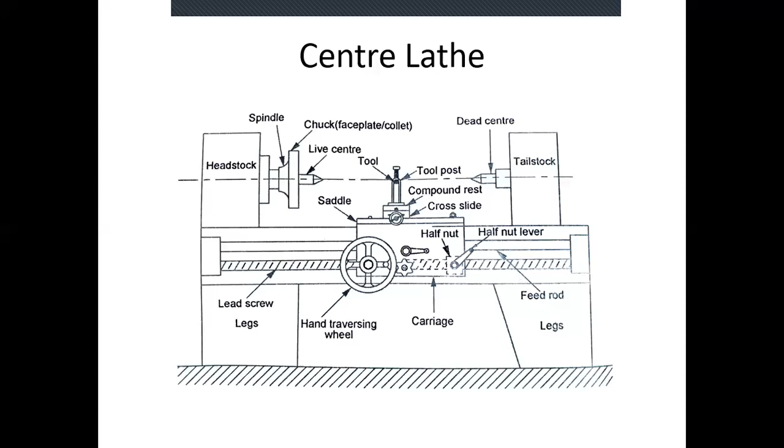For adjusting these jaws, you will have a separate keyway in a particular area, on the top side of the chuck. In that keyway you insert an adjusting nut, and rotating the nut will move the jaws in a front and back movement. The three-jaw chuck is used only for holding circular workpieces.

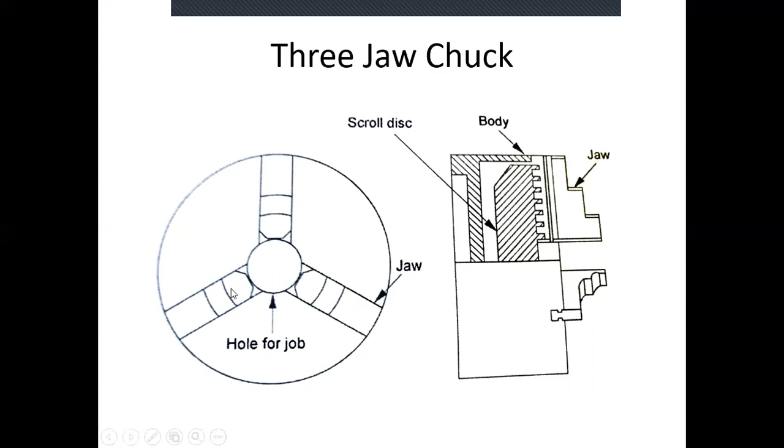With a three-jaw chuck, you can hold only circular workpieces. The next one is the four-jaw chuck. In the three-jaw chuck, with a single adjusting screw, you can adjust all three jaws simultaneously. That is also one important thing in the three-jaw chuck.

Now in the four-jaw chuck, you see there are four jaws. These four jaws are movable in an outward and inward direction, but in the four-jaw chuck, for each and every jaw, a separate keyway is available. In that separate keyway, that particular jaw can be adjusted. For each jaw, there is a separate keyway for adjusting the jaw in a front and back movement.

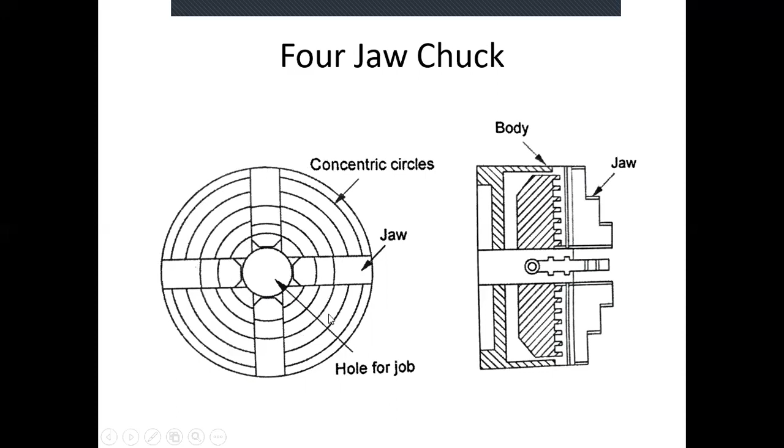In the four-jaw chuck, you can hold circular objects, or you can also hold irregular shapes or square shapes. So different types of shapes can be held in the four-jaw chuck. This is the major advantage of the four-jaw chuck. The next one is the magnetic chuck. This is also used for holding irregular or regular shapes. But in this chuck, you can hold only workpieces which have magnetic ability.

Once you start the lathe, this chuck is magnetized. The magnetic chuck will have magnetic properties, so you can hold only objects which have magnetic properties. This is one of the major disadvantages of the magnetic chuck. Advantages: you can hold any type of object, irregular shapes, regular shapes, anything, in the magnetic chuck.

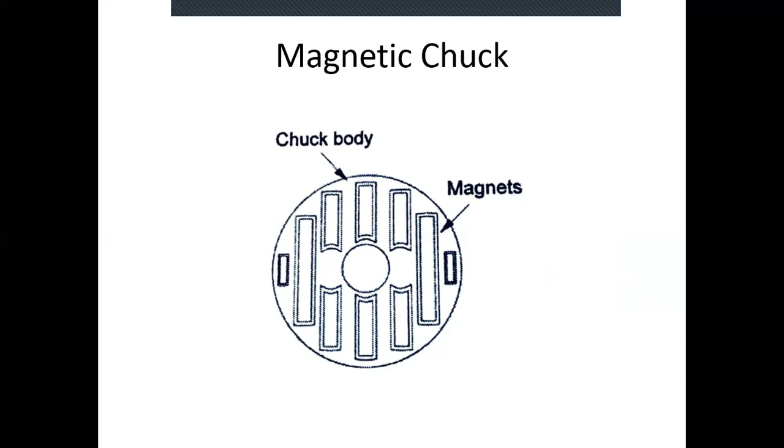Now in this class, this is the main topic. We are going to study taper turning methods in the lathe. So what is taper turning? Producing a small conical surface in the workpiece. That is the taper turning operation. Taper turning is done in the lathe by several methods. The first one is the form tool method.

When the cutting tool contacts the workpiece, metal will be removed from the workpiece due to the friction of these two materials. The cutting tool is a harder material than the workpiece. So due to that friction action, the metal in the workpiece will be removed. The form tool will be in a particular shape. Only in that particular shape and length can you create the taper.

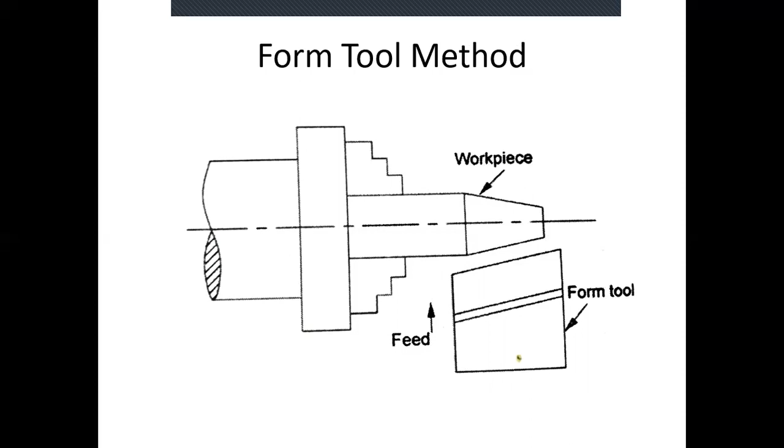The next one is the tailstock set over method. In the tailstock set over method, the workpiece will be held by a live center. They won't hold the component in the chuck; they hold it using the live center. They won't place the component in the chuck because we are setting over the tailstock by a certain angle, so it won't be supported in the chuck exactly.

So in the chuck, they place the live center, and with the help of the live center, they hold the workpiece. The other end of the workpiece is held by the dead center in the tailstock. The tailstock is movable in a slight forward and backward movement crosswise.

Okay, so that to the required angle. Okay, not any angle can be achieved. It will be moved for a certain angle. So within that limit, if your taper length is required, you can adjust the tailstock to that particular movement.

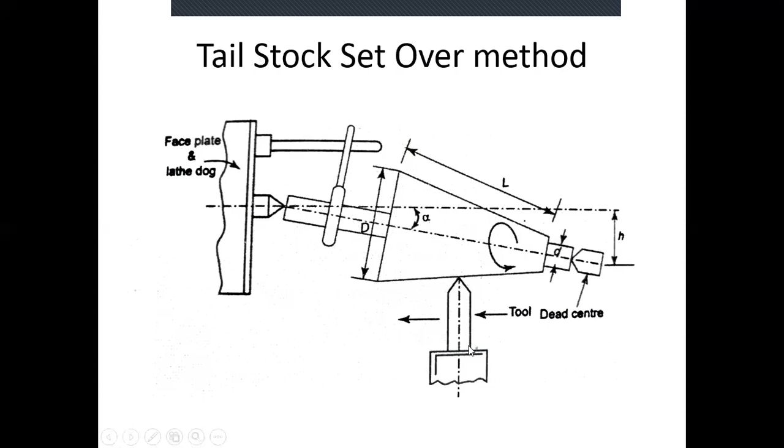The next one is the compound rest method. The compound rest method is the simplest method. The workpiece is held by the chuck. You can use a tailstock for holding the other end, or else that is not necessary. That won't be any problem. In the compound rest, there is an angular keyway adjustment. Okay, for the required angle, you can adjust the compound rest.

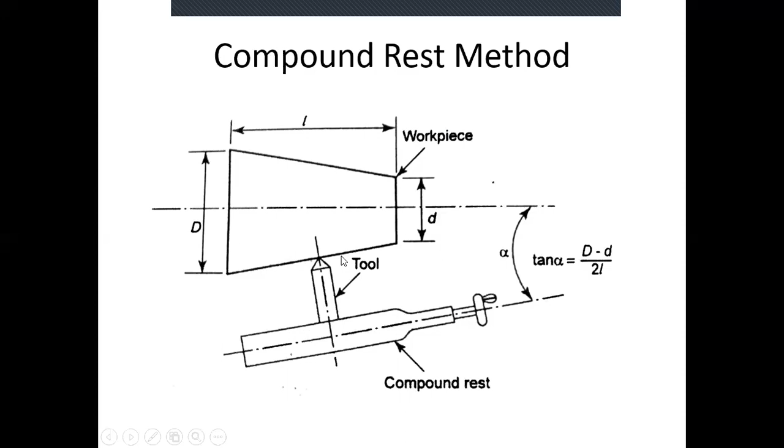Above the compound rest you are placing the tool by using the tool post. Okay, so adjusting the compound rest will make some angular slide for the tool. So adjusting the compound rest to a particular angle and giving the cross feed will produce a tapered surface. This is the compound rest method. The main advantage of this method is you can produce a steep taper. A high taper angle can be achieved, but the disadvantage is the taper is for a small length. The taper length will be very small using this compound rest method.

If the guide bar is tilted to a particular angle, the guide block will move in that angular way, so that this entire cross slide and the feed will be moved in the angular movement. Due to this movement, the metal will be removed and the taper surface will be achieved. So using this method, you can achieve a long and steep taper simultaneously. So this is the taper turning attachment method.